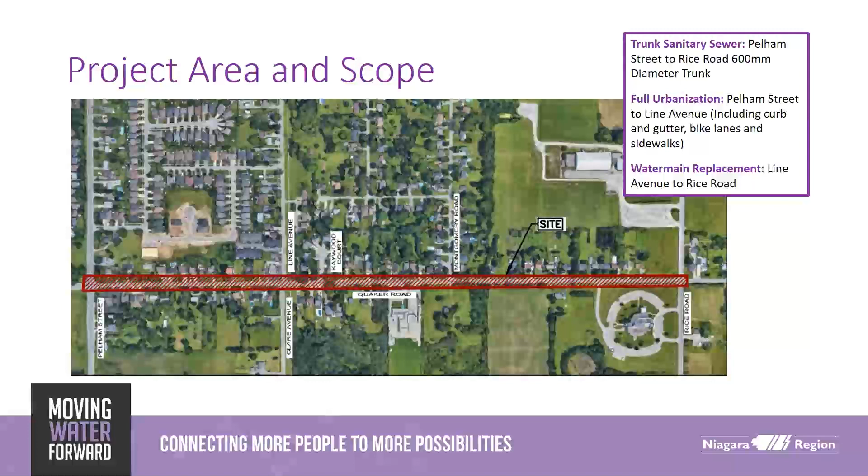The urbanization between Pelham Street and Line Avenue will include the introduction of curb and gutter and a storm sewer collection system, sidewalk on both sides, new sanitary sewer, and water main. The roadside ditches will remain in place between Line Avenue and Rice Road. As part of the region's initiative to promote active transportation, on-road bike lanes will also be included.

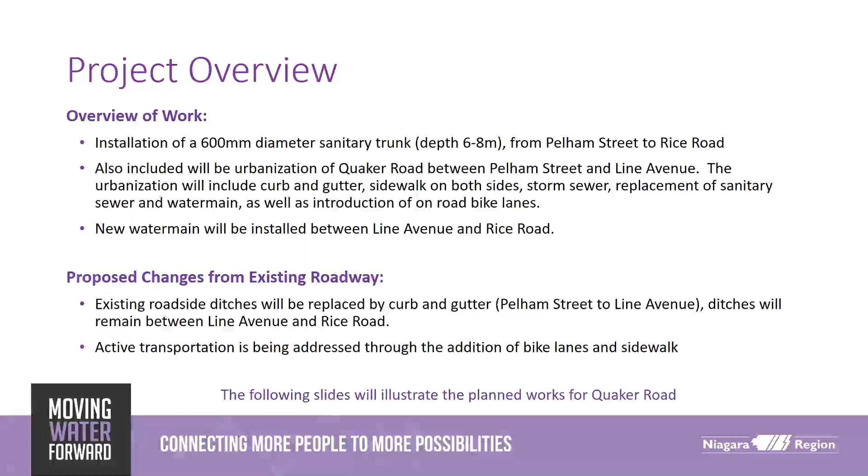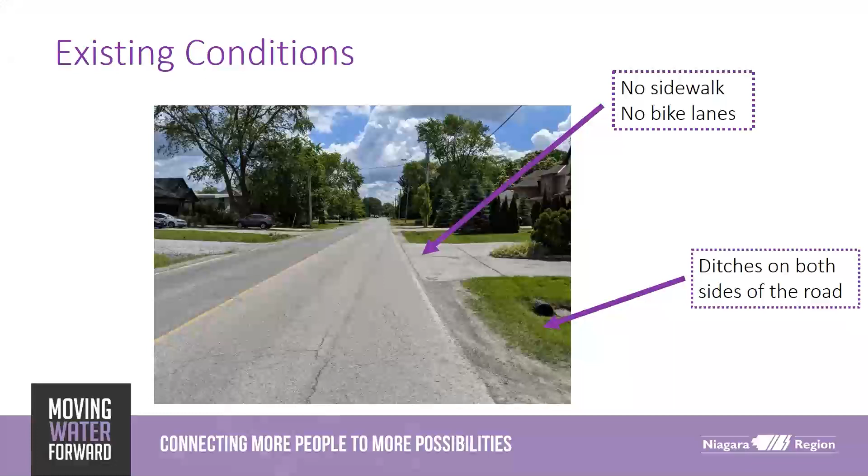Currently, Quaker Road features roadside ditches for collecting stormwater runoff. There are also no sidewalks or bike lanes along Quaker Road. The cross-section shown here is the standard cross-section that is being proposed by the Town of Pelham for Quaker Road between Pelham Street and Line Avenue. It features one 3.5 meter lane in each direction, a 1.5 meter bike lane in each direction, curb and gutter, and 1.8 meter sidewalks on each side of the road.

The north side of the road will have a 1 meter boulevard between the sidewalk and the back of the curb, while on the south side, the sidewalk will be flush with the back of the curb. This is because the existing road is not centered within the right-of-way, and there is more space for a boulevard on the north side without impacting private property.

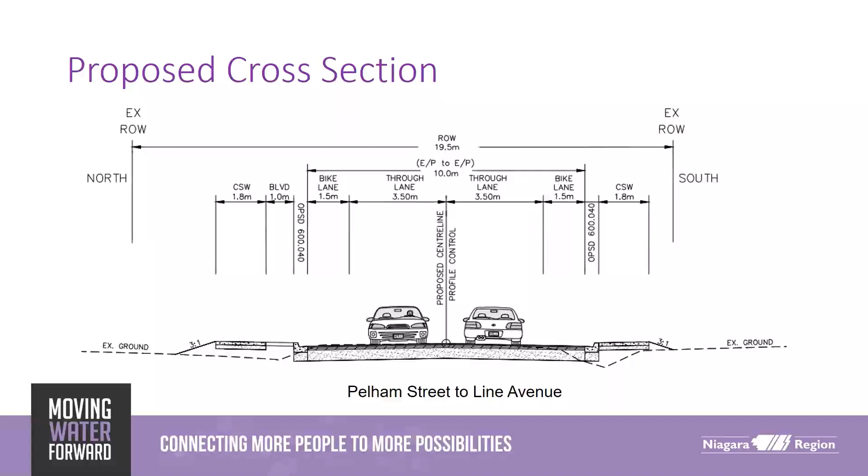This figure is at the west limit of Quaker Road at Pelham Street and shows the cross-section laid on top of an aerial image, and is a good way of evaluating the impacts of the cross-section to the existing property. With the introduction of the curb and gutter and the sidewalk, many of the driveway culverts will be eliminated. The design will also include alternate means for addressing runoff, which currently makes its way to the existing ditch.

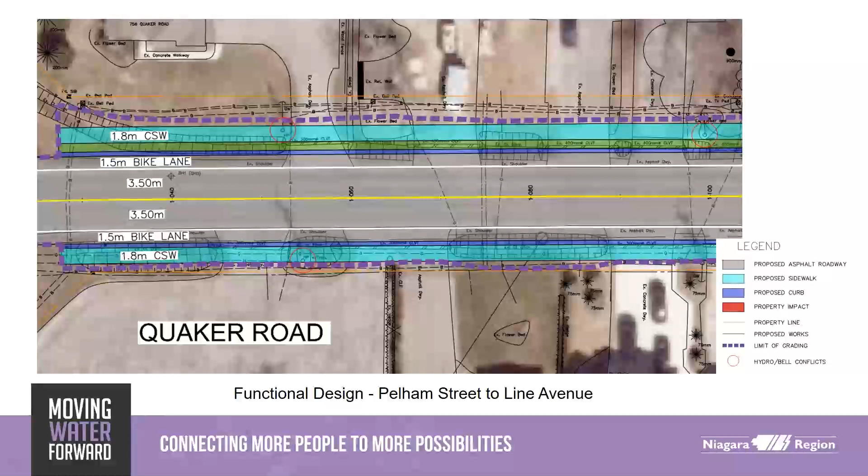At Line Avenue, the sidewalk will extend beyond the intersection and connect into the Steve Bauer Trail. This drawing shows minor property and utility impacts, which will be mitigated through design. Utility impacts may result in some relocation of existing infrastructure during or prior to construction.

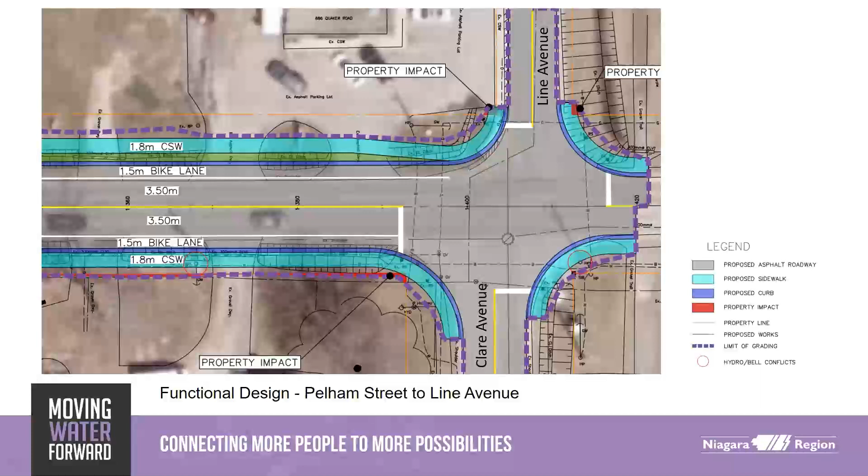There are a number of factors that led to the selected cross-section between Pelham Street and Line Avenue. The proposed improvements will result in increased safety for pedestrians and cyclists. Pedestrians will now be separated from the road by a barrier curb and have a dedicated facility. Quaker Road is designated as a cycling route, and now cyclists will have their own dedicated on-road facility.

The introduction of curb and gutter will help control runoff from the roadway and will eliminate the pooling that occurs within the ditches. The existing local sanitary sewer and water main are approaching the end of their serviceable life, and this is an excellent opportunity to replace the infrastructure while the road is being disturbed by the sanitary trunk installation.

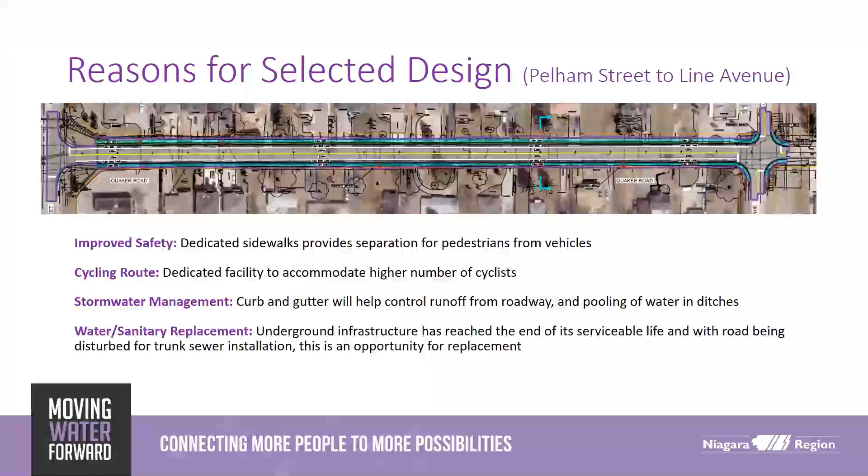The sanitary trunk will be placed in the center of the roadway wherever possible. However, the alignment does vary to avoid existing infrastructure, specifically the local sanitary sewer, which is not being replaced between Line Avenue and Rice Road at this time. The new 300 millimeter diameter water main will be installed along the south side of the road to avoid conflict with existing infrastructure. The existing ditches and driveway culverts will be reinstated wherever they are disturbed by the installation of the water main and the sanitary trunk.

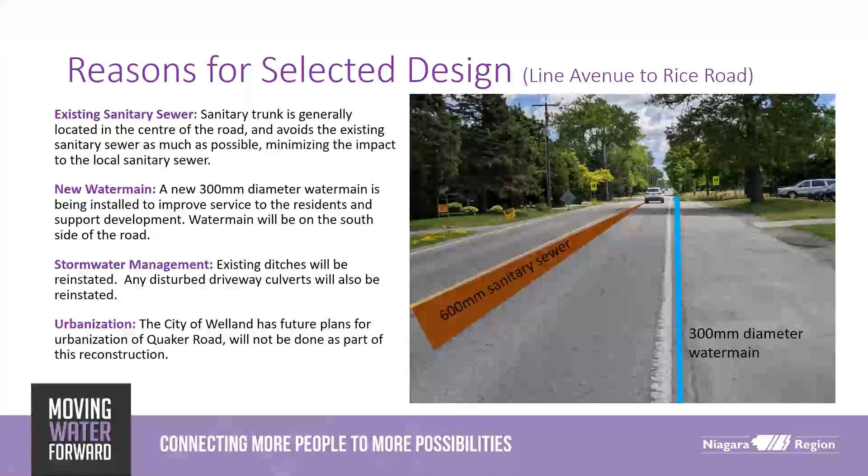The City of Welland has plans for urbanization of Quaker Road in the future, but it is outside the planning horizon of this project. This construction assignment will be split into 3 phases and is expected to run approximately a year and a half, from spring 2023 through to summer of 2024.

Phase 1 of the project is to install the sanitary trunk between Pelham Street and Line Avenue. Phase 2 will be to complete the urbanization of Quaker Road between Pelham Street and Line Avenue. Phase 3 will be to install the trunk sewer and water main between Line Avenue and Rice Road. Phases 2 and 3 of this project will be completed concurrently and cannot start until Phase 1 is complete.